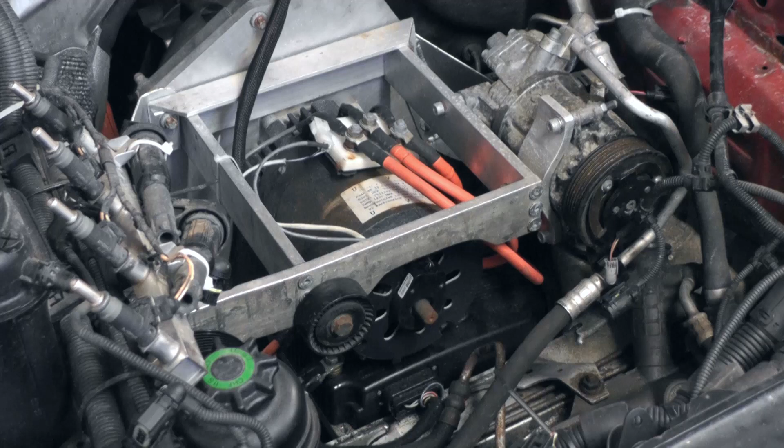First up, we've got the dreaded motor vibrations. You know the feeling, your teeth are chattering, your hair is standing on end, and your neighbors are knocking on your door wondering if you're running a go-kart track in your garage. But fear not, my friends, because we've got some tricks up our sleeve to help solve this noisy problem.

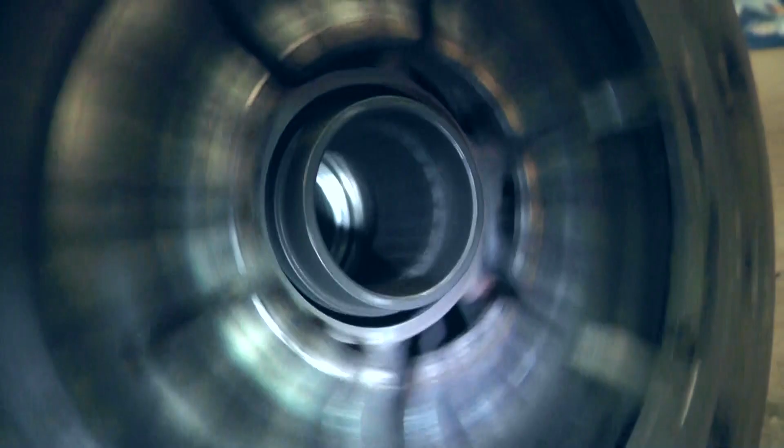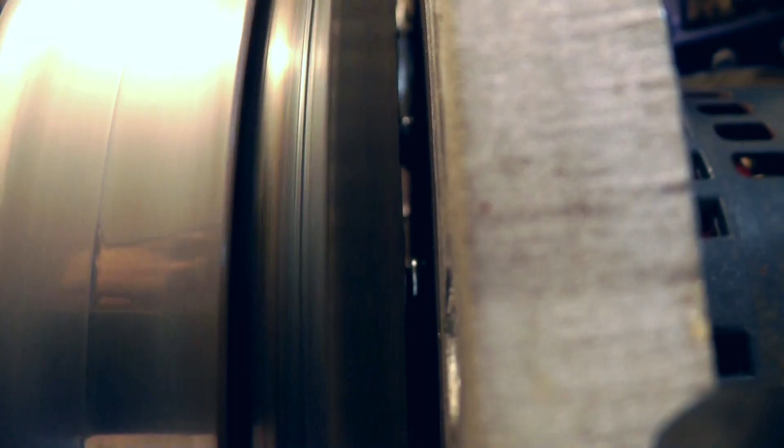Now, let's talk clutches. You might think that a wobbly clutch is cause for concern, but not so fast, my friend. Sometimes things aren't always as they seem. When we took off the clutch, we saw that the flywheel was also wobbling a bit, but that's apparently no problem. But wait, there's more.

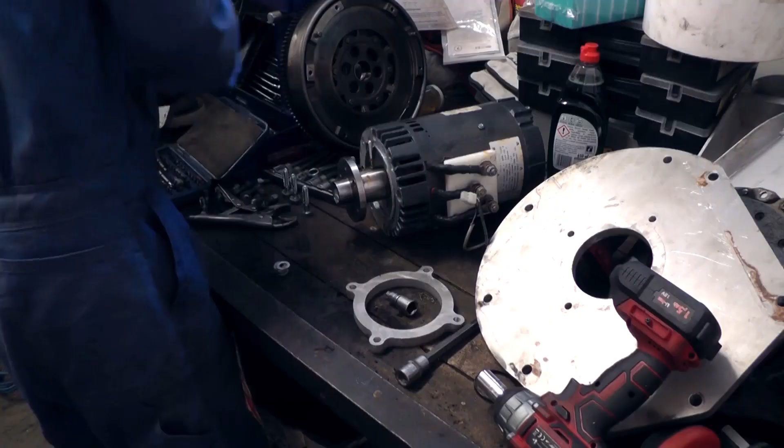We took everything apart, checked the adapter, and even consulted a professional lathe expert who also knew more about motors and transmissions. And what did we find? We were missing a bearing. Easy fix, right? Wrong. Turns out, the bearing didn't quite fit. But did that stop us?

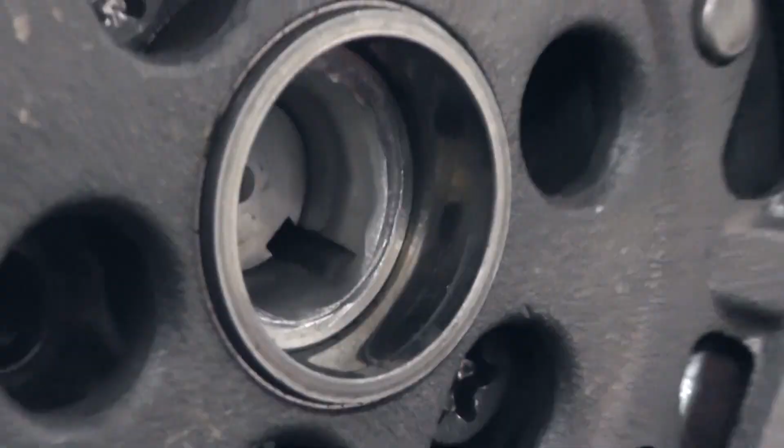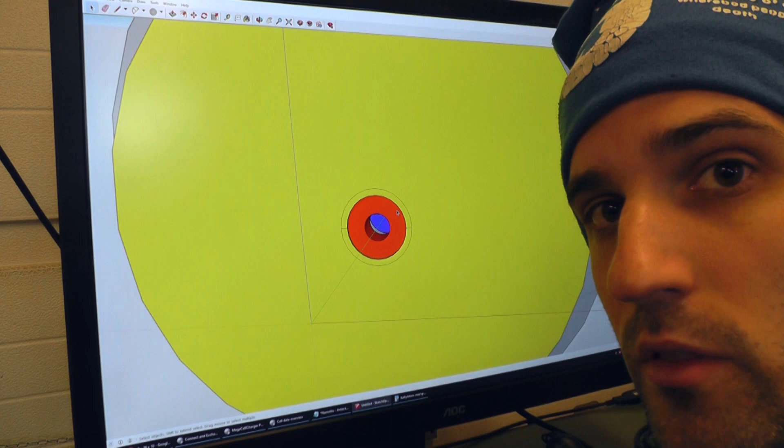This is the bearing that we need there. It was missing before. We need to have a bearing there to get rid of the vibrations. It fits in the hole, it's just that there's 1 millimeter of play. But we can solve that, I guess. This is the gearbox.

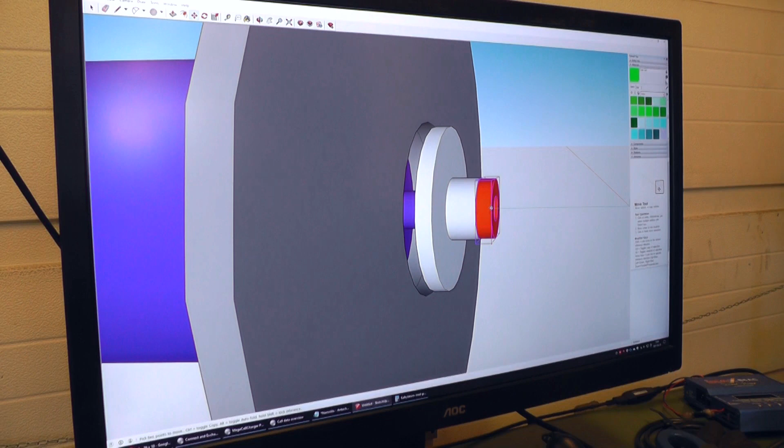If I could somehow move this guy 14 millimeters further in, this is almost 14. So if I move this guy that far in, there's not much space left for the adapter. Then it will be the wrong size, it won't fit perfectly. I mean, here's the flywheel.

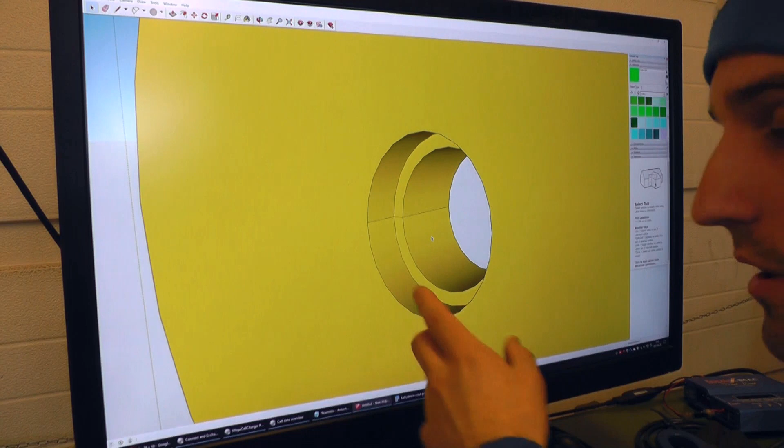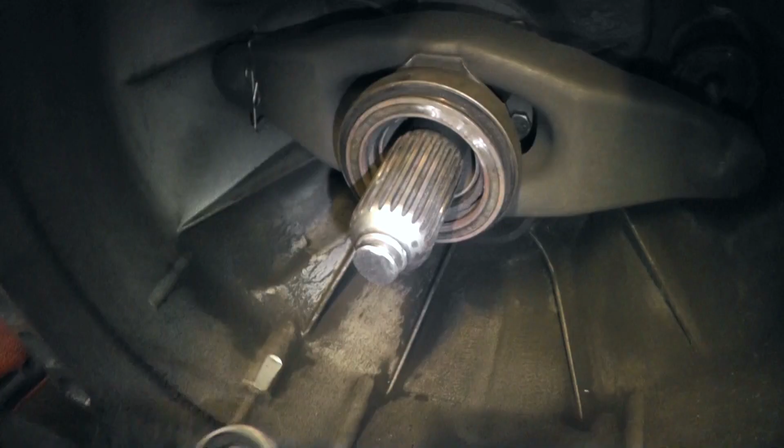And you can see that it starts here with a bigger diameter, and then it goes in and becomes a smaller diameter. It has to be longer than 10 millimeters for it to be able to do anything, because otherwise if it's less than 10 millimeters it will be in the bigger groove and then it won't be able to center. This bearing fits here perfectly, so they're both 15 millimeters, very tight fit, so it's perfect.

And in here it doesn't fit perfectly, because there's 1 millimeter difference. I didn't find a bearing that had this diameter, so... But did that stop us? No way. We're motorheads, and we don't back down from a challenge. So what did we do? We got creative, that's what. We added some aluminum tape to the bearing to make it fit. It may not be pretty, but hey, it gets the job done.

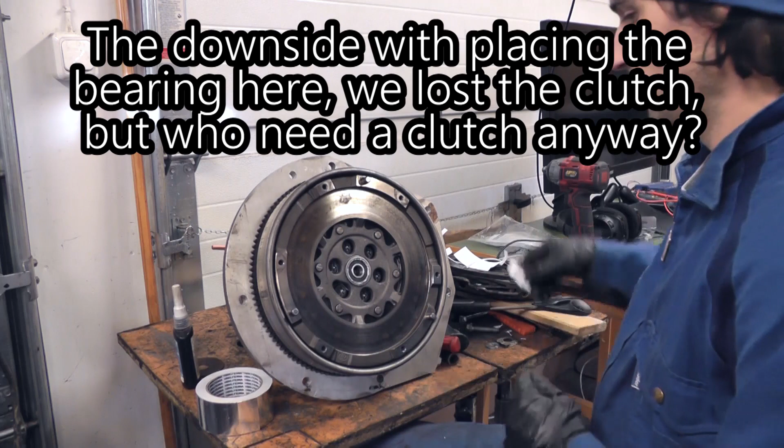So there you have it, folks. When it comes to engines and transmissions, you never know what you're gonna get. But with a little bit of elbow grease, some creativity, and a whole lot of determination, you can conquer any motor-related challenge that comes your way.